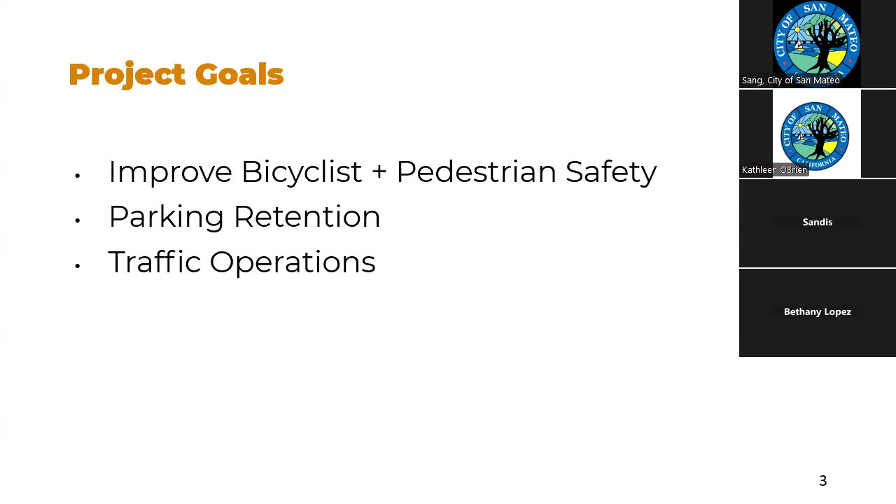I also wanted to note that stakeholder and community engagement for this project has been very crucial for us. We've had a community engagement phase stretching well over a year, with phase 1 starting as the project first got underway, informing our initial design concepts. That has concluded up to tonight, where we followed up with residents back in April, and we're looking to close the loop tonight, close off any loose ends, while presenting the revised design. After the September council meeting, we're looking to bid and award the project and hopefully construct it later this year into 2026.

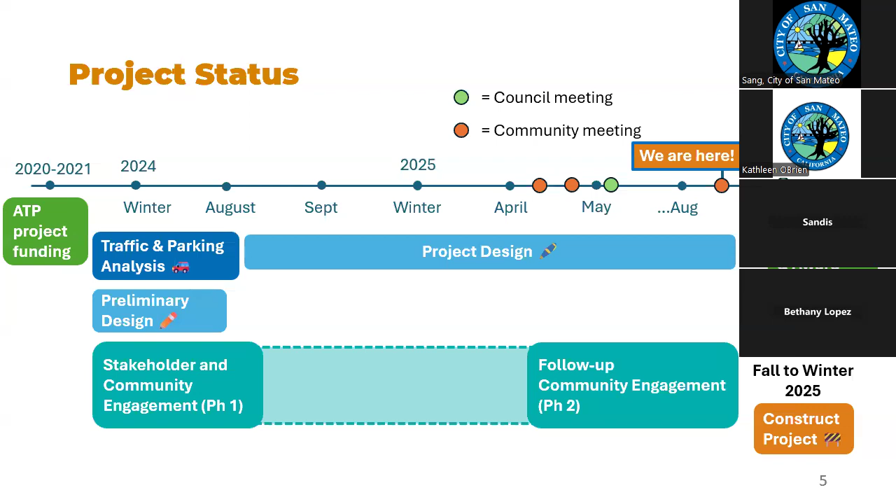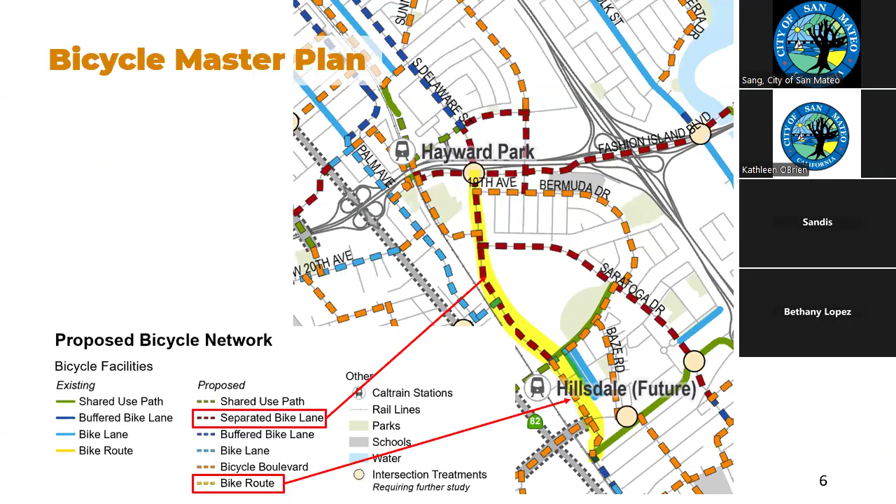Here we have the bicycle master plan I was referencing—the bike master plan network map—with our project limits highlighted in yellow. The red dashed line shows the portion of Delaware Street intended for separated bike lane improvements, currently a class 2 bike facility, along with bike boulevard treatments from 28th Avenue down to Pacific Boulevard. This image shows how Delaware Street is the backbone infrastructure, connecting users with transit destinations, future bike lanes, and existing bike lanes on Pacific Boulevard and elsewhere, increasing accessibility for active transportation users.

Zooming out, this is still the bike master plan network map, but I've highlighted Delaware Street between the city limits, stretching from Peninsula Avenue up toward the northernmost boundary of the city, and down to where Delaware becomes Pacific Boulevard and practically Old County Road near the city of Belmont. Delaware Street is truly the only continuous north-south connector for the city of San Mateo entirely. That shows how this project scored so highly as part of the bike master plan, and it was also part of the bike master plan rapid implementation network. We're looking to implement 1 mile of that as a portion of this entire Delaware Street, but it shows how crucial this project is to ensure connectivity for our users.

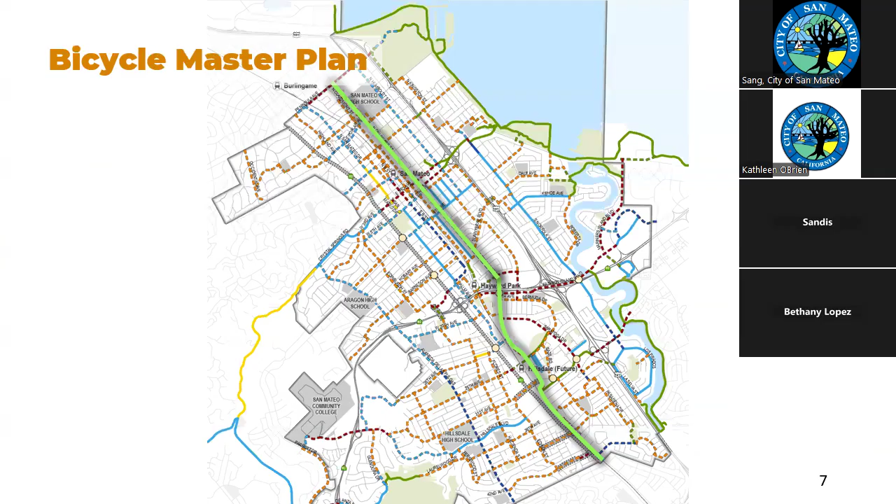Next, we're zooming back into our project limits. Here we see a closer image of our 1 mile project scope. From 19th Avenue down to 28th Avenue, it is a physically protected bikeway—one with a buffer, separated by a vertical element such as bollards, as you can see on screen. That protection can come in many forms, but our project has chosen green bollards, which are pretty standard in the state of California. From 28th Avenue to Pacific Boulevard will be a bike boulevard treatment.

And I've also highlighted in those yellow filled circles just the various land uses. We're obviously here, not in Fiesta Gardens, but College Park Elementary now. And there's definitely a presence of the event center. We have Bay Meadows that is not shown. We have another school, the Nueva School at 28th Avenue. And also how Delaware Street connects to mass transit destinations such as Hillsdale Caltrain Station and Hayward Park Caltrain Station, that is not shown here.

As I mentioned before, the project not only seeks to enhance accessibility for these different land uses and destinations, but also to various bike lane projects that are not quite shown here on this image, but we're looking to implement in the long-term future, as well as some upcoming projects that you may have heard of in the news.

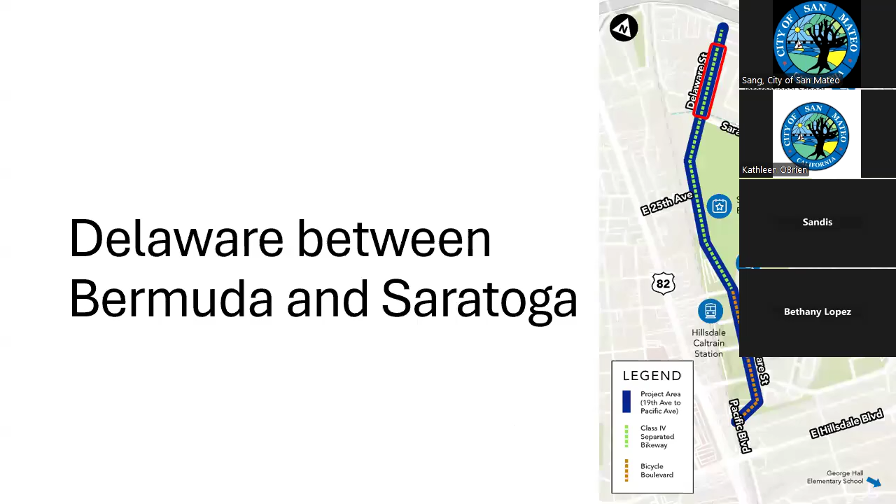I know I would talk about the revised design, but just to refresh everyone's mind, and if it's your first time seeing the project design, this on your screen is actually the original design. From Bermuda Drive, headed south on Delaware Street, we have that travel lane reduction. We have a left turn pocket making southbound left turns at the Bermuda Drive and South Delaware Street intersection, and vehicles proceeding straight south will only have that 1 lane in our original design.

So we're looking to reduce the lanes here, largely because we're redistributing the width of that vehicle lane to accommodate our bike facilities while retaining parking on the east side of Delaware Street. The specific numbers are that we're retaining, in our original design, 14 of the existing parking spaces, which results in an overall reduction of 4 parking spaces within this segment from Bermuda to Saratoga.

And you'll see here, headed north or up the screen, that the northbound travel lanes must be retained or remain to serve the heavy traffic flow headed to State Route 92, as well as the more northern part of San Mateo.

So flipping it a little bit, north is now looking left and south is to the right of your screen. We definitely realized that these localized changes presented to the public back in April were quite contentious, as residents were voicing their concerns as well as persistent issues they've been experiencing for many years, even prior to this project.

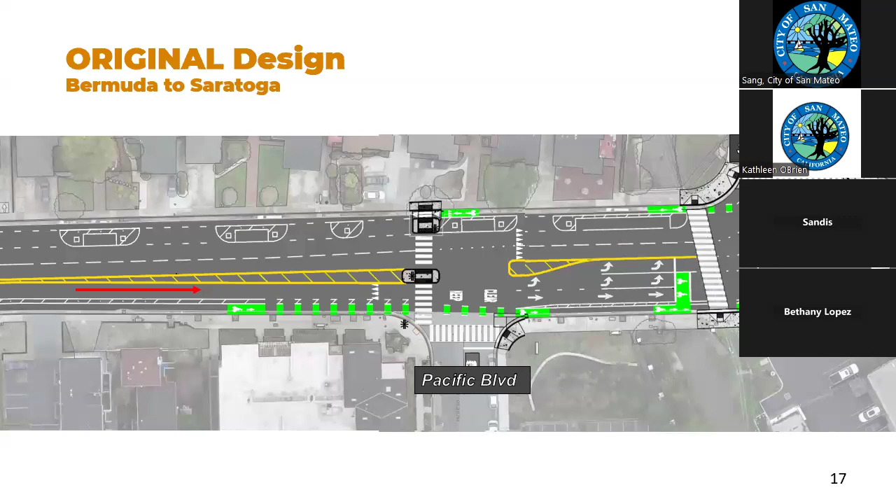So here, just to zoom in a little for easier viewing, we have a single southbound through lane in the original design, showing Saratoga Drive and Pacific Boulevard. Here's the revised design, which is approximately the same limit as shown in the prior slide.

Here we see, noted by the red arrows, that we're retaining the 2 southbound travel lanes as shown in the 2 red arrows on the screen. So we're still choosing to keep the dual southbound left turn pockets onto Saratoga Drive, as the traffic operation supports that traffic traveling south in both the morning and afternoon peaks can be accommodated by the single through vehicle lane from Pacific to Saratoga. The dual left turn pockets will also help us best manage the traffic demands for the county event center's largest or biggest events, which typically occur around 5 to 7 times a year.

So I kind of flipped it back, so north is now up on this image and south is down.

In this revised design, we're retaining 2 southbound through lanes from Bermuda Drive to Saratoga Drive, or about Pacific Boulevard. I mentioned the parking impacts earlier—we're impacting 12 parking spaces on the east side of Delaware in favor of keeping that vehicle lane. Staff is currently reviewing options for additional parking on Pacific Boulevard to partially offset parking losses on Delaware.

We're looking to retain 6 of the existing 18 spaces. Moving further north, we see 4 vehicle lanes as mentioned prior, and we actually see the beginnings of the parking impacts noted in that red rectangle on the upper right of your screen—continuing with the 4 vehicle lanes and parking impacts here, about 12 spaces. But we're choosing to prioritize the bikes in this scenario and make sure they're protected with a class 4 facility from Saratoga all the way to Bermuda.

Here's a table showing the parking counts in the revised design as well as the parking loss—really the most important column is the parking loss. Originally, in the original design, we were losing about 4 spaces. In the revised design, we're looking at losing up to 12 spaces on Delaware Street, meaning we have a difference of 8 parking spaces lost between the original and revised design. This doesn't account for the potential gain of parking on Pacific Boulevard, but we wanted to be fully transparent with the community about this change.

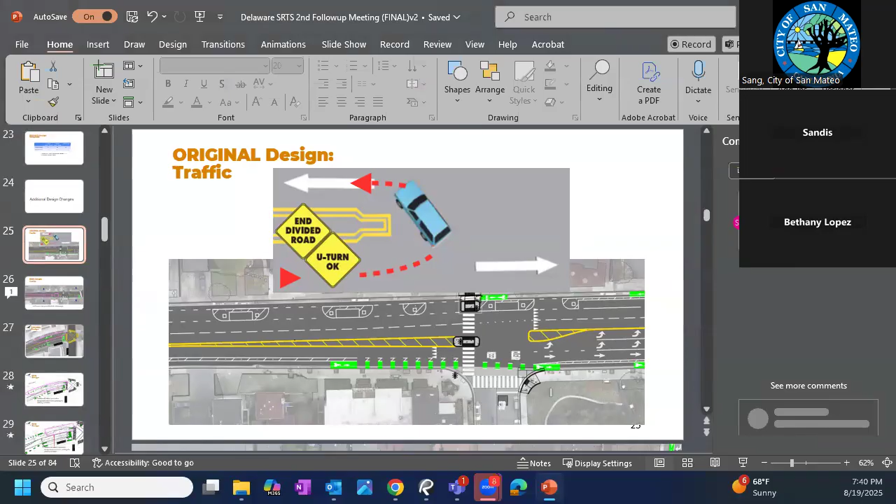Originally I mentioned that residents were concerned about the inability to make a northbound or southbound left on Delaware Street.

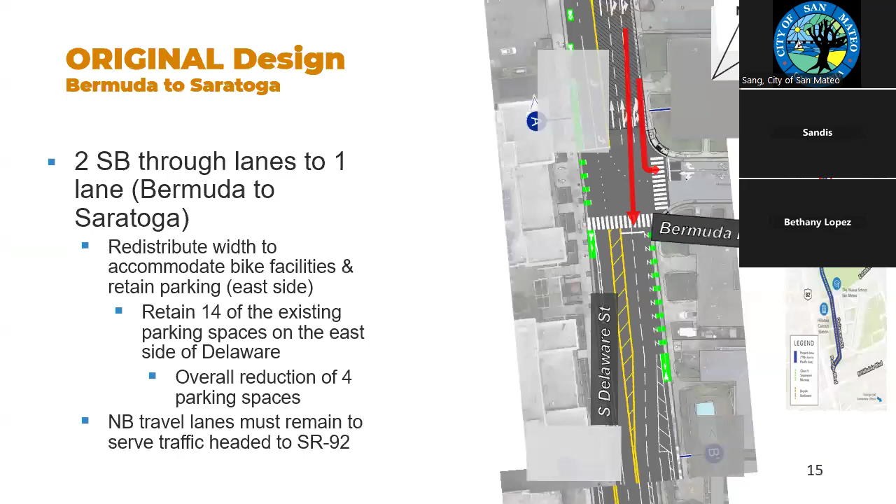So in the revised design—yeah, we're just summing it up. Yeah.

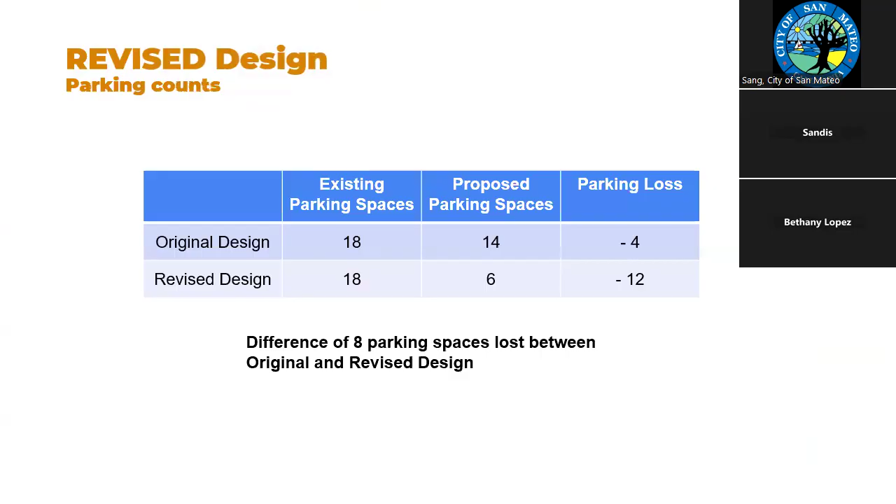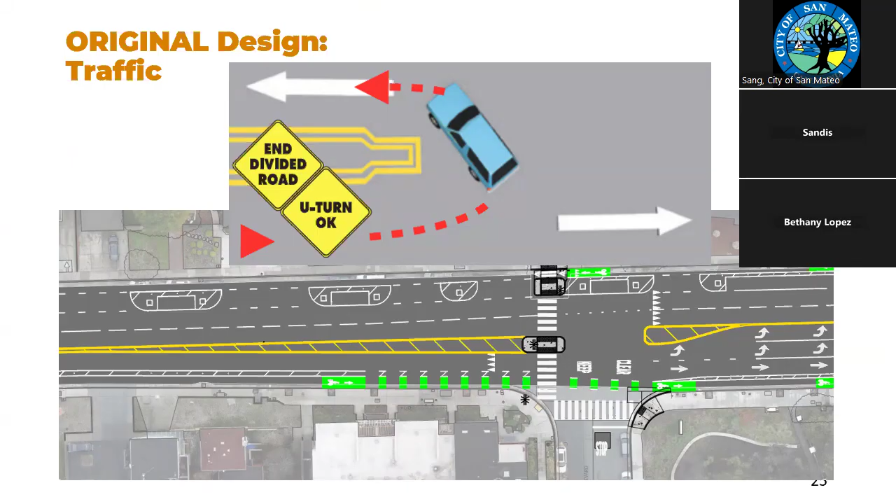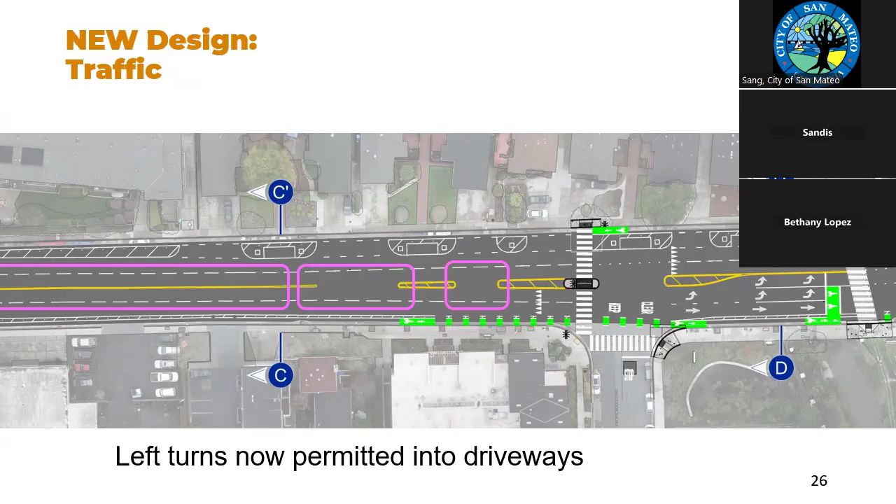In the revised design, we're actually looking to change up the center line striping to make that movement basically a legal movement. In the original design, we had a double set of yellow center line striping down the middle of Delaware Street, basically making it so cars couldn't even make a left turn into their driveways. In the new design, we're opting to open up the center line where possible, and the left box notes a single set of double yellow center line striping, which a driver can legally cross over to make a left turn if they wish to access the driveway. So basically, left turns are now permitted in the revised design.

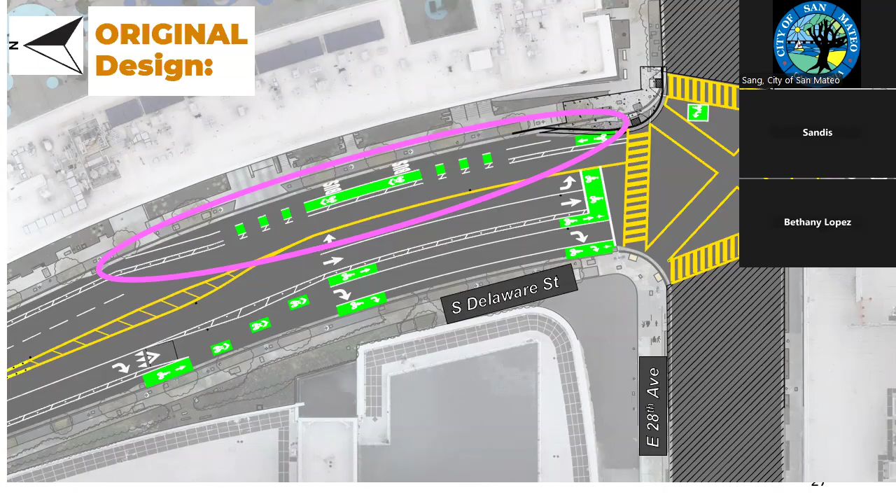In the original design, the bike community expressed concerns about vehicles parking in the bike lane in post-project conditions near East 28th Avenue and South Delaware Street, immediately north of it—that's actually a persistent issue right now. In the new design, we'll be adding additional protection for our bikes and formally striping short-term parking spaces for folks looking to access Montero Apartments, near its front entrance, approximately right here. We're opting to add additional bollards, protect our bikes, and give drivers a chance to park here short-term as needed. Here's a close-up view, and we have that exhibit printed out to look at as well.

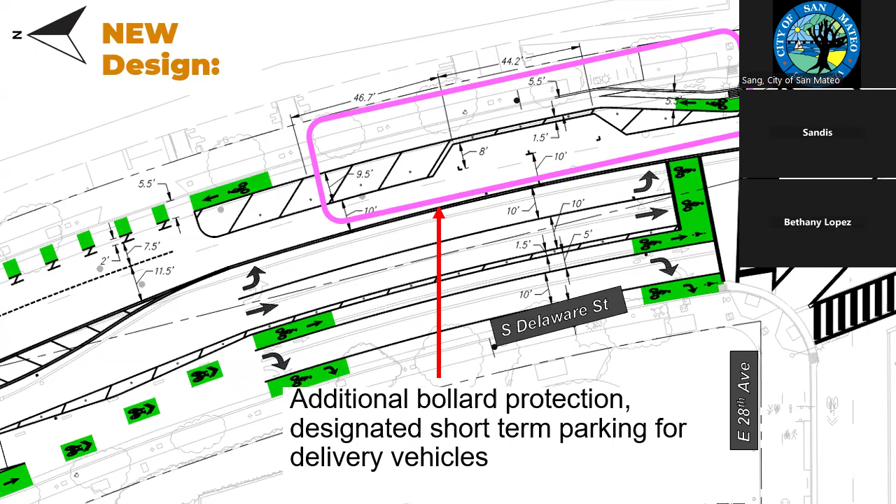Thank you, that's all I had. If anyone has any questions, feel free.

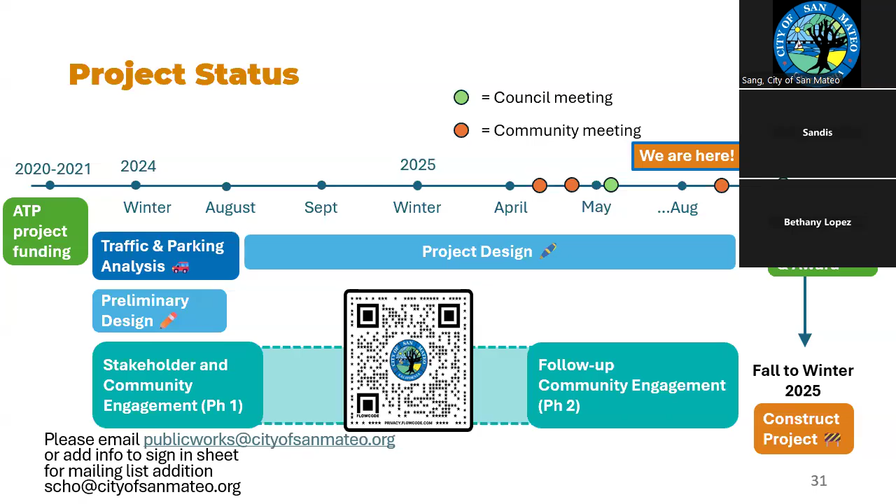We're largely responding to community comments. So that's why we're here to bring this revision, because we heard a lot of community comments and concerns about the prospect of reducing travel lanes. And the impact and result of reducing travel lanes, the concern is over what? We listed out several of the concerns about potential loading within the travel lane, about access to the event center during events, and along those lines. And so those concerns prompted us to look at how we are approaching the design comprehensively, and that is what led us to the design revisions that we've done.

Can you go ahead? I had a question about the width of the bike lane, the bike design going southbound. Is there... sometimes there, like where the lane is narrower, we have to ride on the center seam, and that makes it difficult.

Right. So the question is about the bike lane between Bermuda and Saratoga, or really the entire project? I mean, I think that's the main place where I have a concern, because in the other parts it seems like it's more flat, not right at the center, more toward the middle. Right. Yeah, that's why we're going to.

So generally speaking, if that's the question, we're adhering to the minimum widths required by Caltrans, and we are including the gutter width as part of that width.

So did you want to add anything? Sure, one other thing to consider is that we do have that buffer space. Especially where the gutter lifts out to accommodate the inlets, we're still maintaining an operational space for the bicyclist. There might technically be a strip there, but there's operational space from the edge of the bollards to that gutter seam, maintaining at least 4 feet throughout the corridor, so bicyclists don't have to ride on the gutter seam.

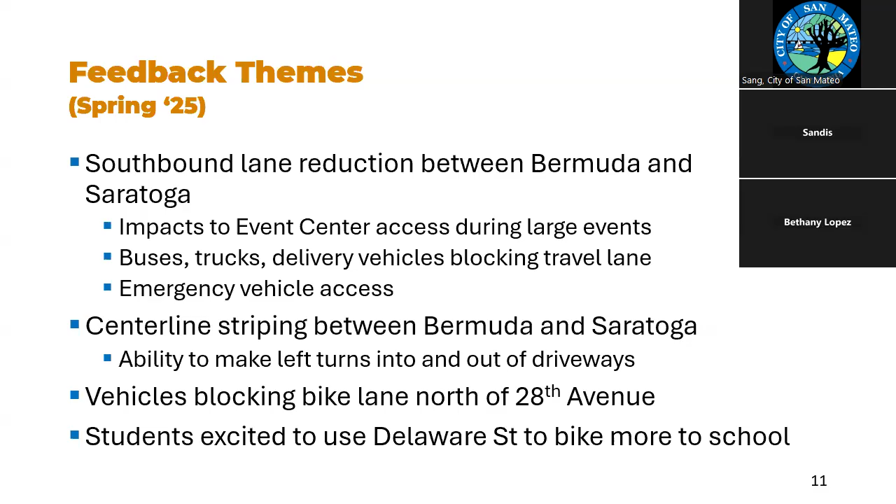Was there a question from Mike? Can you pull up the first map you had on, prior to that you had... I think that's it. Sorry, if you go south. Oh, what?

So at Saratoga and Bermuda, are there two crosswalks going across? Just the one, and that's on our project design. I think a slide with that. Yep, just one, I see it back over there.

Yeah, that doesn't seem optimal, especially because it was one of those 3-way crosswalks on El Camino. It took me 4.5 minutes to get across the street because I had to go 3 ways around. And especially with Bermuda being next to a school, or at least the campus right down Bermuda, it seems like we'd want to make it as easy as possible for people to get across Delaware, instead of having kids who probably aren't going to go 3 ways around if it's not safer.

So why is there no crosswalk there? I believe there's a walk signal for one, so we need to be able to construct that. There's no crosswalk on the north leg. I think that's the question. Oh yeah, yeah, you started to get that.

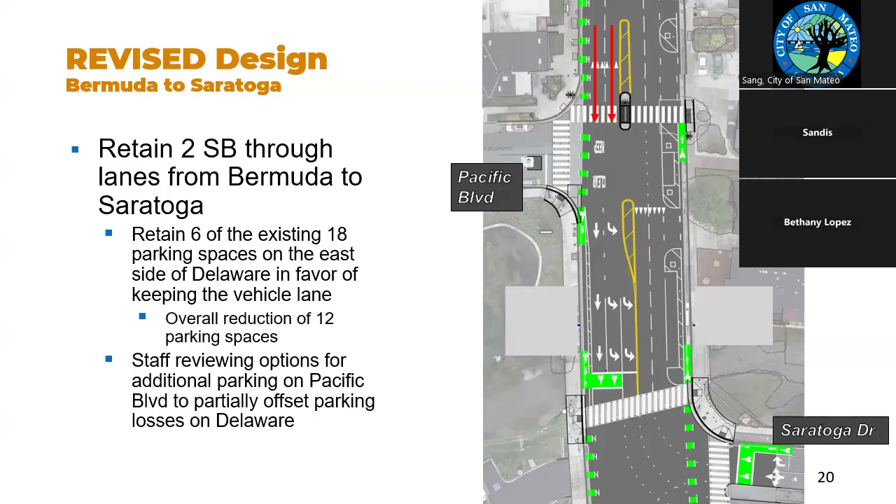This one? So look to the left, so Bermuda, to the left is north, right? So there's no way to cross Bermuda there, on the left or north side. Correct, except to cross three ways there. Well, let's say you want to go from the bottom to the bottom left to the top left.

But that's a sidewalk. Is that not a driveway exit? It is a driveway, so that's not bad. We typically have the walk signals rest as a walk signal, like green on Delaware Street. Not as important, but I think we should have crosswalks everywhere with people. We had that the entire street. Everywhere.

My question made me think about one other thing, one of the primary things I want to say. In addition to the list of comments you presented, there were a sizable number of folks commenting on the fact that there were no safe routes to school changes being made on Bermuda itself. I recall at least 6 to 8 folks who expressed this concern. I think it's an important part of what should be part of this project.

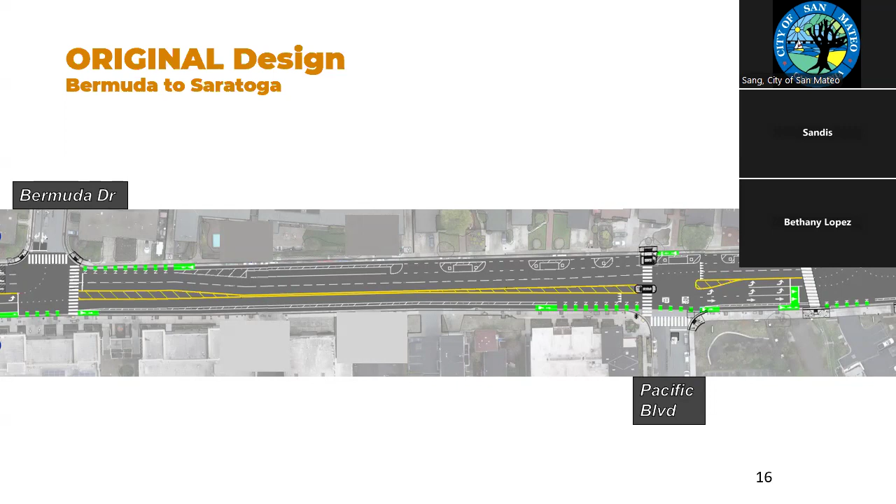I'm a resident of Ironwood, and I appreciate the revised changes. When I initially saw the one lane, I thought we'd never get out of the complex. So I definitely appreciate the 2 lanes still being there, being able to make a left out of our complex. Just wanted to point that out. We all have our agendas, everybody has points of view. I wanted to speak for Ironwood because we've been there, and we've kind of gotten the brunt of apartment complexes being built on the right side and left side of us, sort of the forgotten original 28 units there. I definitely appreciate that entry and exit, so thank you very much.

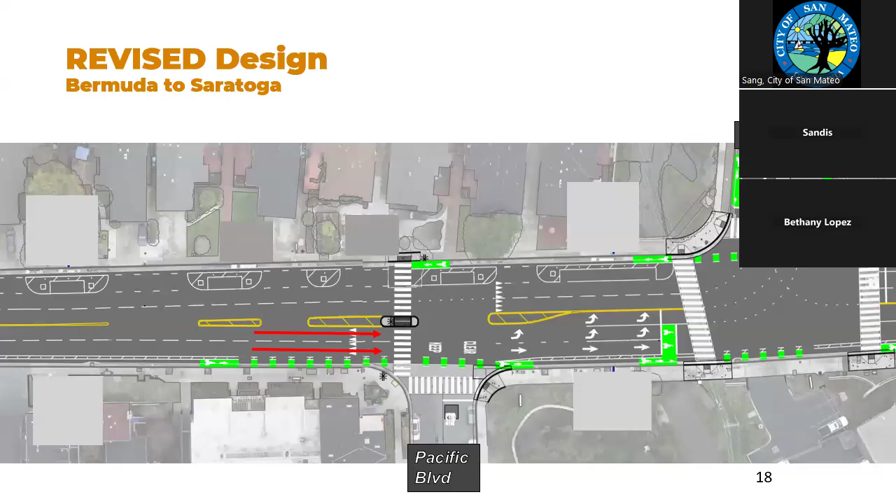Thank you. Yeah, I just want to say, speaking on behalf of all of us, we're very excited for this project that will improve our safety.

Awesome, thank you. One quick follow-up on this design: if I remember correctly, the other bus stops along this project are in-lane bus stops. This one is the lone one that is not an in-lane bus stop. Why the special treatment? Just curiosity. They're not in-lane, no. They all pull over to the curb. Apologies, I heard somewhere they were in-lane. No, I apologize, but yeah, they all do pull over to the curb.